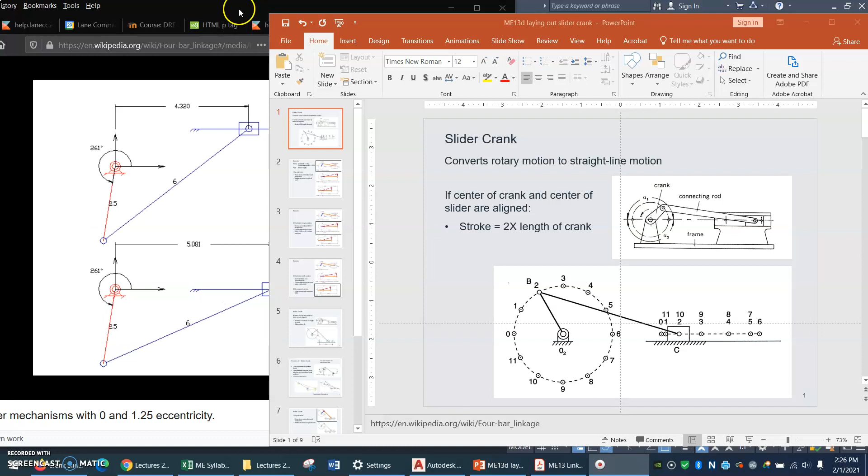Now about laying out a slider crank. In the notes field of the second slide, I've given you this link to a Wikipedia page. Hopefully it still works. And they have several animations on this page, a drag link and several others, and a slider crank. You can see this is really crude and simple, but it illustrates how a slider crank works.

In the animation on the bottom, the fixed point and the slider are lined up in a line. So you can see that the slider just slides back and forth horizontally, lined up with that. In the animation on the top, the slider is not lined up with the crank, and so the stroke length won't be 2 times the crank, it'll be some other number.

But still you can see here's the crank going around, and as it does, it pulls that slider back and forth in a straight line. And notice those bars are not stretchy, they're not made of rubber, they're made of something that doesn't stretch. And so you can figure out how long they are and where they're going to move to.

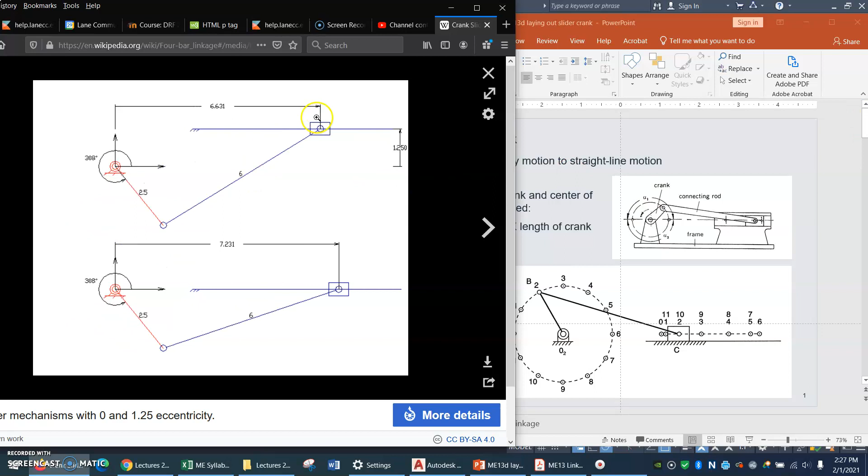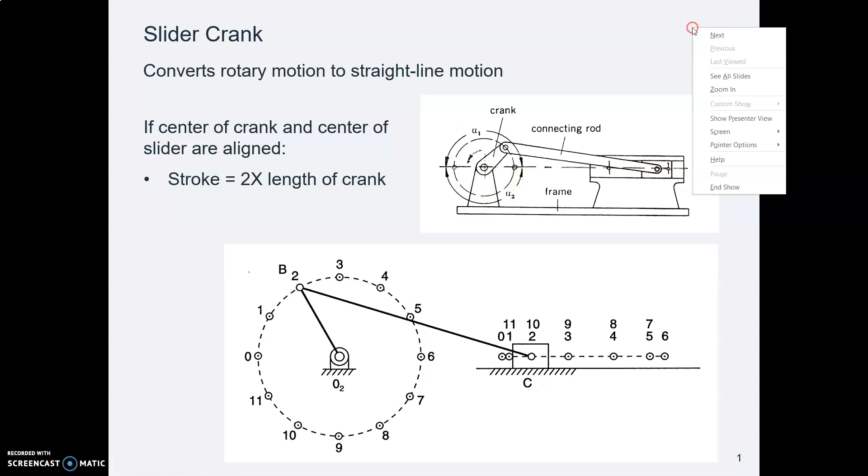Alrighty. So let's look at this slider crank situation. As you saw in that animation, it converts rotary motion from the crank into linear motion from the slider. Let's look at an example that's in our book here. In this example, he has the pivot of the crank and the slider all lined up on a straight line.

And he says that crank, AB, is 1 1/4 inches long. The connecting link, BC, is 3 1/4 inches long. And we're supposed to lay out the schematic and then find out how long is the stroke length. And this is not the homework problem, this is just an example out of the book.

So we know that that crank doesn't stretch, and so the point on the end of that crank is going to land somewhere on a circle whose radius is 1 1/4, isn't it? So as that crank goes around, that pin on the end is going to trace a circular path, and it's going to be a radius of 1.25.

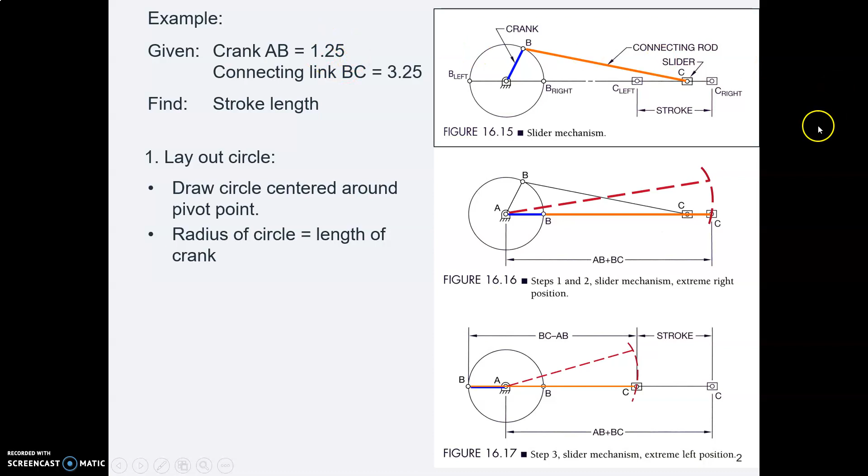Now to find the extreme right position, the stretched out position, what do we know? We know how long the crank is, and we know how long the connector is, and so when they're stretched out straight as far as they will go, what is the radius of that circle that they trace? What is the length of that stretched out thing? It is the connector, 3 1/4, plus the crank, 1 1/4, so that total stretched out length is 4.5 for this example. Your homework problem will have different numbers.

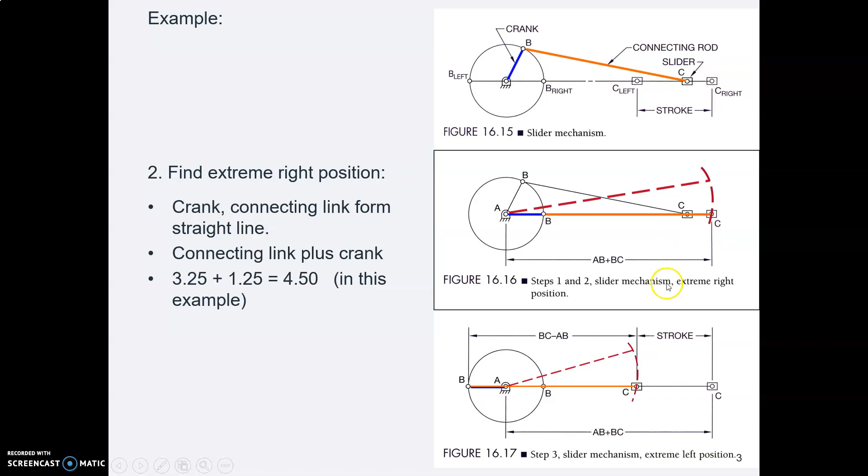So you can draw a big old circle with a radius of 4.5, and that slider is going to land on that circle somewhere. Then for the extreme left position, that connector is going to fold up over the top of the crank, isn't it? And I've tried to show that crudely here.

So the connector is 3 1/4 inches long from B to C, and it folds up over the crank, which is 1 1/4, AB. And so from the center of the crank out to this end point where the slider is going to be is connector 3 1/4 minus crank 1 1/4. It's going to be a radius of 2 inches from A out to C. And so I have drawn a part of a circle that size. That is going to be the extreme left position of that slider.

Now notice that in this case the pivot that the crank turns around and the slider are all lined up in a straight line. So the stroke is going to be 2.5 from the right to the left. That's twice as long as the crank. He told us that this crank is 1.25. The total stroke, you will find, will turn out to be 2.5, exactly twice as long.

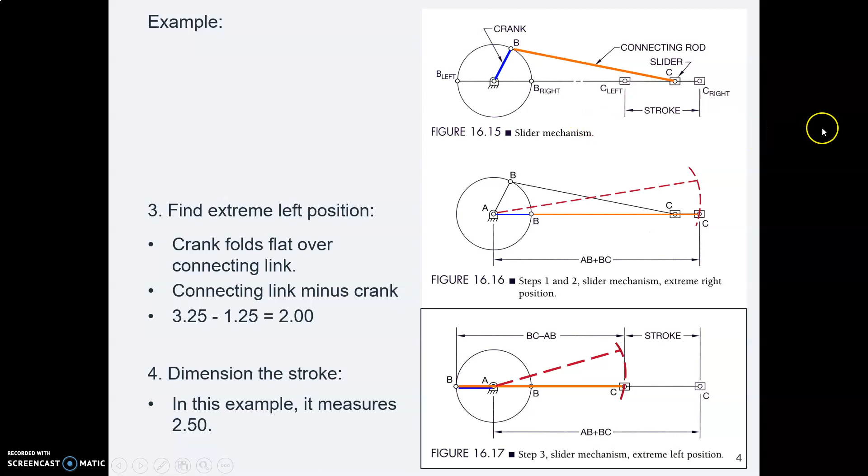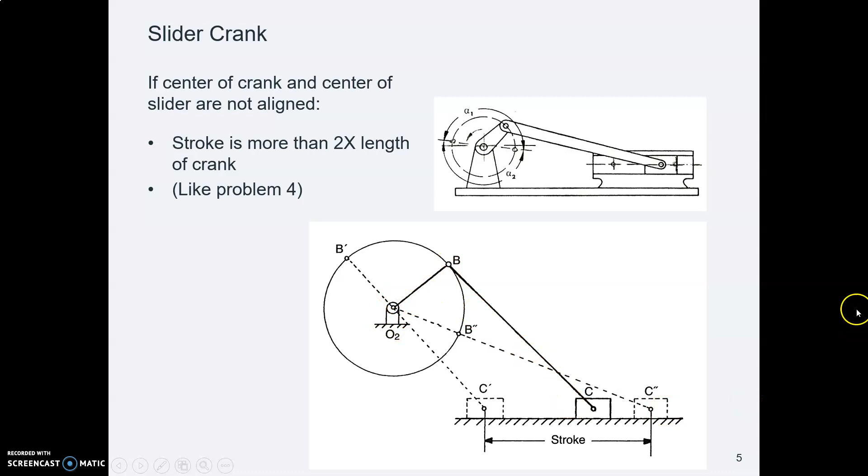And what you need is the crank and the connector stretched out in a straight line as far as they will go to the right, and the crank and the connector folded up over each other, so that'll be as far as they go to the left. And that will show you the far right and left positions of the slider. That will let you dimension the stroke.

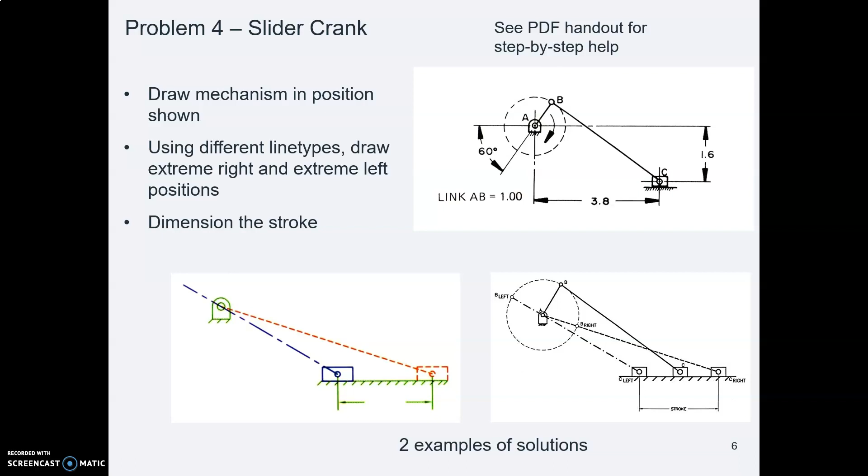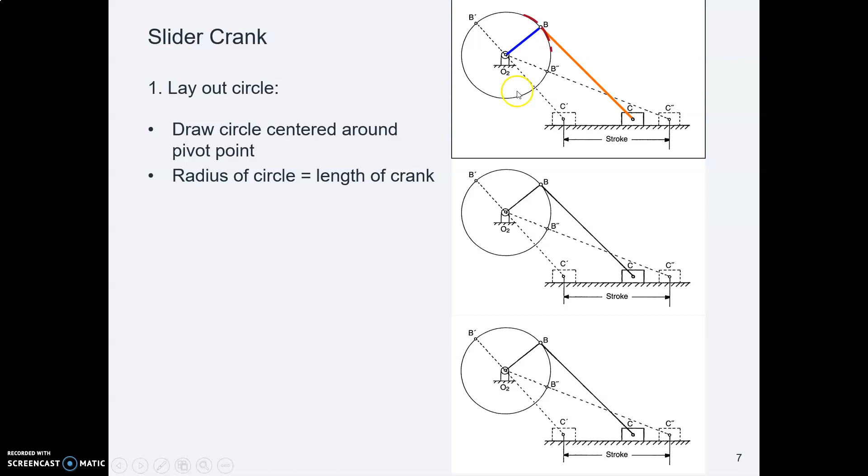So what you'll do is you'll draw a circle for the short crank there, and then you'll draw a big circle whose radius is the crank plus the connector stretched out straight. That big circle will be centered on the center of the crank, and its length will be crank plus connector. Then you'll draw another circle centered on the crank, and its radius will be connector minus crank. And there's that circle.

And where that circle intersects the height of the slider, you can just draw the slider there. Where the long stretched out to the right circle intersects the height of the slider, you can position the slider there. And so you'll have the far right and the far left positions, and you can dimension the stroke.